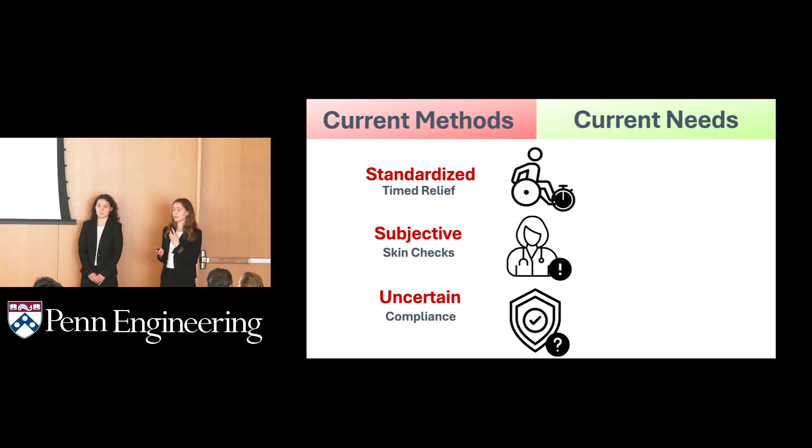standardized 30-minute time intervals. Skin checks are the secondary line of defense, but clinician judgment is subjective and varies heavily by the clinical training or the skin tone of the patient. And compliance is uncertain. We have no way to track the timing of these strategies or to confirm that they're

effectively restoring blood flow. In talking with clinicians, we revealed a need for individual alerts attuned to the patient's unique risk, grounded in physiological data that can detect this initial rise in local skin temperature, and with real-time monitoring to confirm these strategies are performed effectively and when necessary. We've also identified comfort, function, price, and ease of use as the most important qualities to integrate in our solution.

And Levara has addressed all of this with a low-cost disposable patch that alerts paraplegic patients of elevated pressure sore risk with real-time monitoring of skin temperature data. We chose temperature as our metric because an increase in temperature is linked to an increase in inflammation, which is an early indicator of skin damage and pressure ulcer formation.

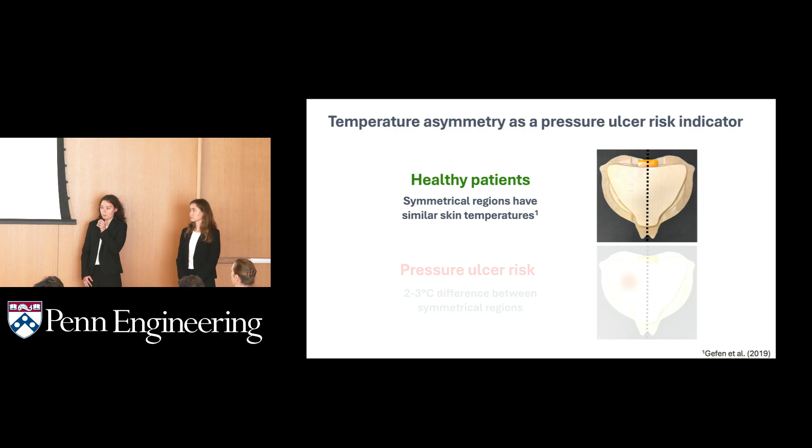We will be assessing temperature spatially instead of over time to mitigate the risk that the environment will have on our skin temperature readings. For example, the difference between being indoors versus outdoors today. This is backed up by the data, which says that across a symmetrical axis, healthy skin will have approximately the same skin temperature, but there will be a 2 to 3 degrees Celsius difference if one area is at risk

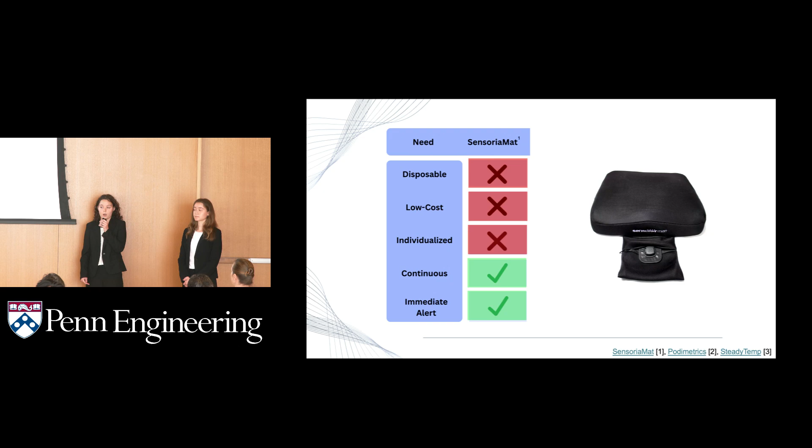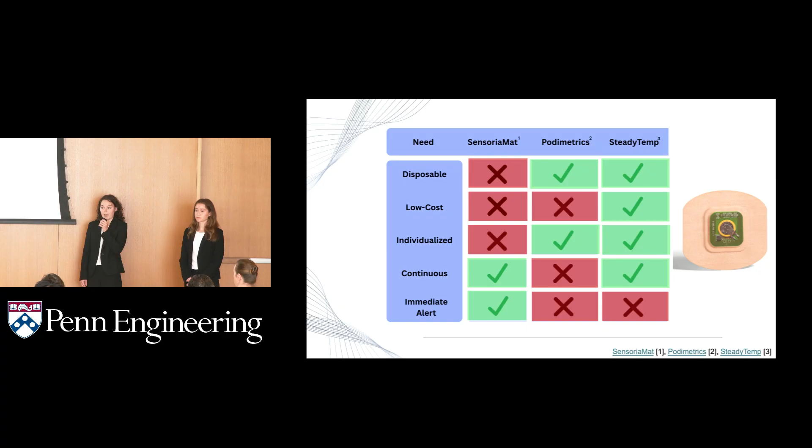for pressure ulcers. Our current competition includes a pressure sensing mat called the SensoriaMat, which is not individualized, low cost, or disposable, Podimetrics, which is not low cost, continuous, nor does it give an immediate alert, and skin thermometers like SteadyTemp that are not optimized for pressure ulcers and do not give an immediate alert to at-risk patients, while Levara does all 5.

First, it's disposable because it'll be on the lower back, where it will be exposed to a lot of sweat and incontinence, so for ease of use, it can be changed every 1 to 3 days. And since it's disposable, it must be low cost, which we'll do by having all of our complicated, expensive electronics in a separate relay center that can be attached and detached with each new patch.

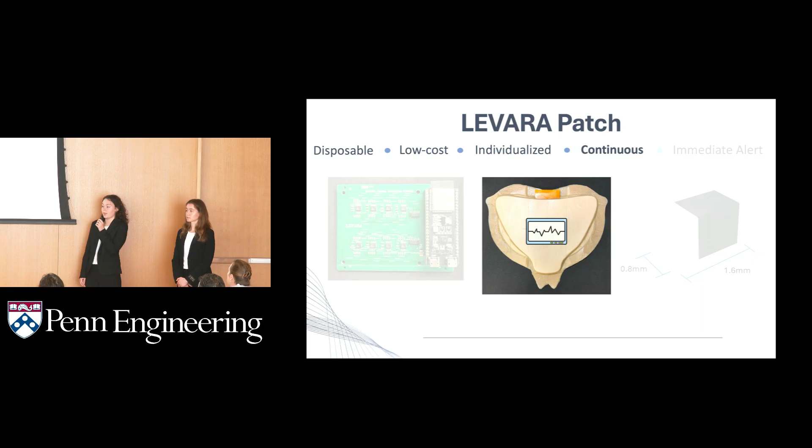Each patch has 62 thermistors that will be detecting temperature, making our design individualized, and they will be doing so continuously and giving an immediate alert when the patient is determined to be at risk.

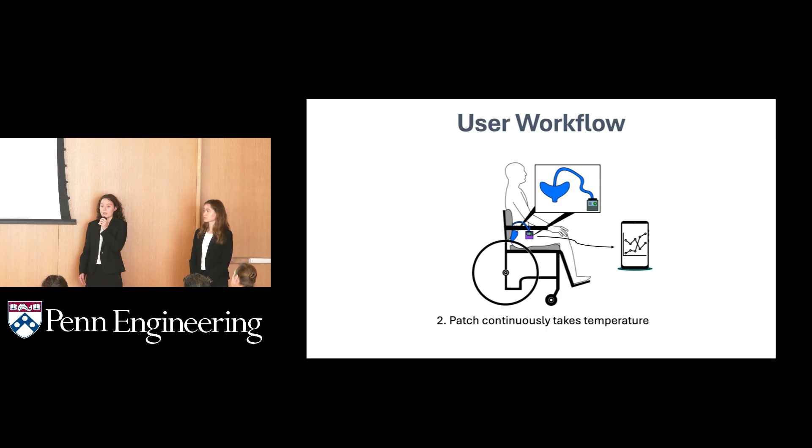So for the user workflow, first the patient will put the patch on their lower back, which is where a majority of pressure ulcers occur in paraplegic patients. Next, they will connect their phone to the relay center, which will start sending data via Bluetooth. When an area has been detected to be a higher temperature than its symmetrical counterpart, an alert will be given that will prompt the patient to either lift up or tilt back in the pressure relief position, depending on the type of wheelchair they have.

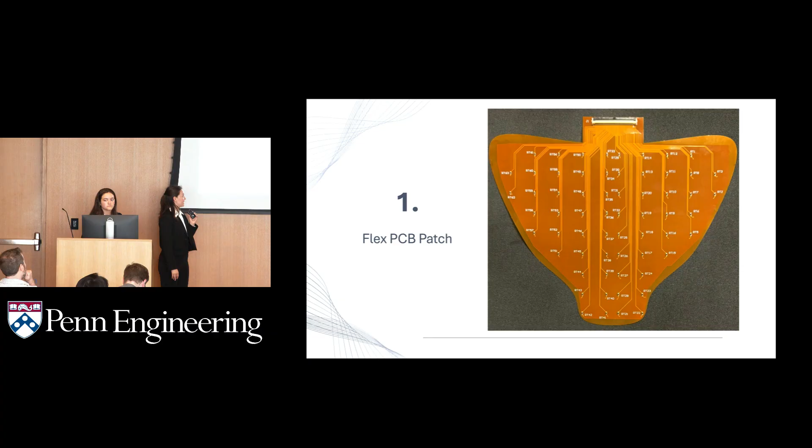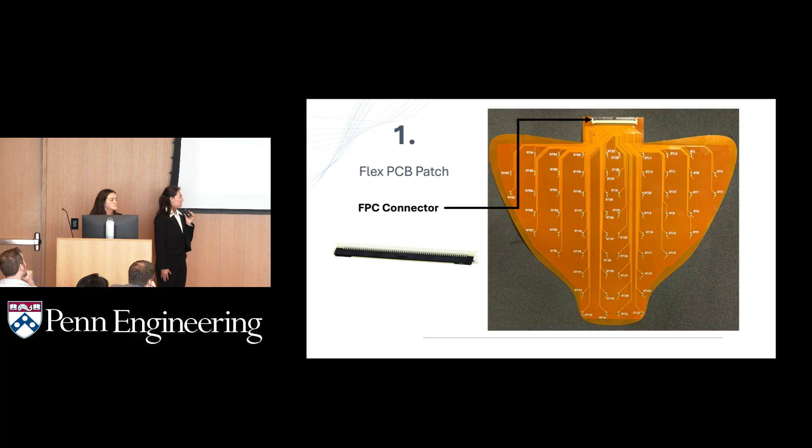Levara is made up of 3 main components. We'll start with the flexible PCB patch. This patch contains all of our thermistors with an improved 1% tolerance for temperature sensing accuracy. The small size of these thermistors means that they do not protrude from the patch, allowing patient comfort. The thermistors are connected to our relay center through an FPC connector. Disposing of the patch is as easy as disconnecting the cable and reconnecting a new patch.

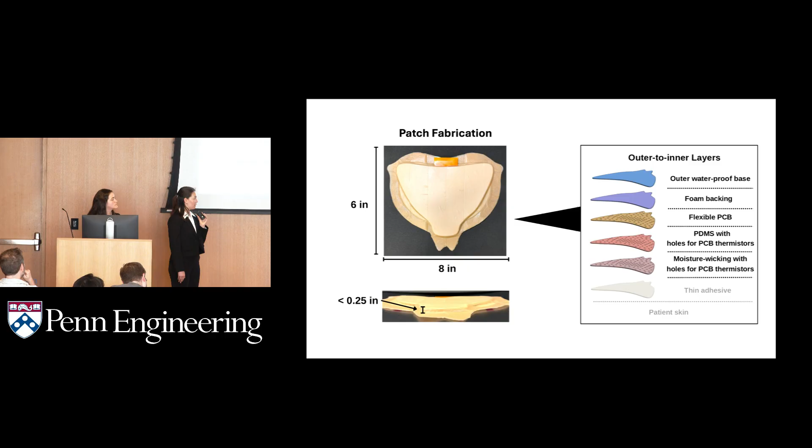An outer wound dressing covers this flexible PCB for patient comfort and electronic safety. This outer patch is made of multiple layers, each with a specific use intended. The outermost layer is waterproof for safety, followed by a foam backing for patient comfort, and then the flexible PCB sits with a PDMS layer that includes holes for the thermistors that also provides electronic safety. Next, a moisture wicking layer removes sweat and any moisture, which is also a risk factor for pressure ulcer development. And finally, a thin adhesive adheres the whole patch to the patient's skin.

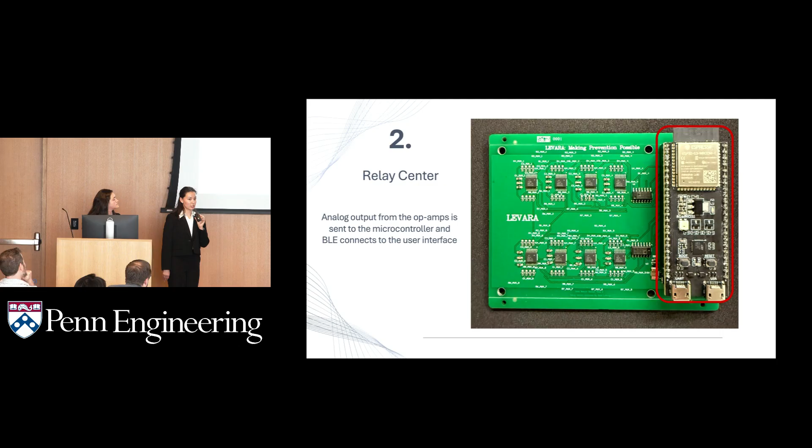The second component is the relay center. This relay center contains 8 multiplexers, which receive inputs from all of our thermistors. The outputs from the multiplexers are then sent to the operational amplifiers, which finally send their signal to the microcontroller. The microcontroller uses Bluetooth Low Energy to interface with our final component, the user interface.

Our user interface prompts the user to connect through Bluetooth and is compatible with mobile phones and computers, allowing Levara to be accessible to as many patients as possible. Additionally, users are able to view trends and they can send their data to trusted caregivers or physicians to better their care. Levara has come a long way from its conception. Let's walk through our design goals from proof of concept to present.

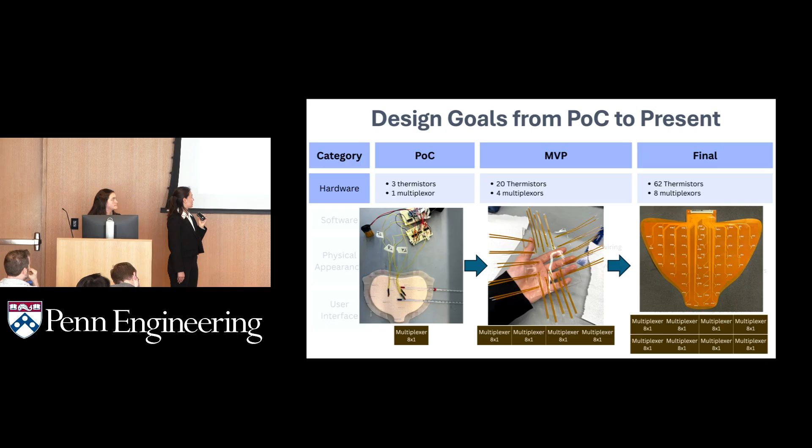Starting with our hardware design goals, our proof of concept used 3 thermistors and 1 multiplexer. Our minimum viable product then used 20 thermistors and 4 multiplexers, and our final iteration included 62 thermistors with 8 multiplexers. For our software design goals, we began with an Arduino, and for both our minimum viable product and final, we used an ESP32.

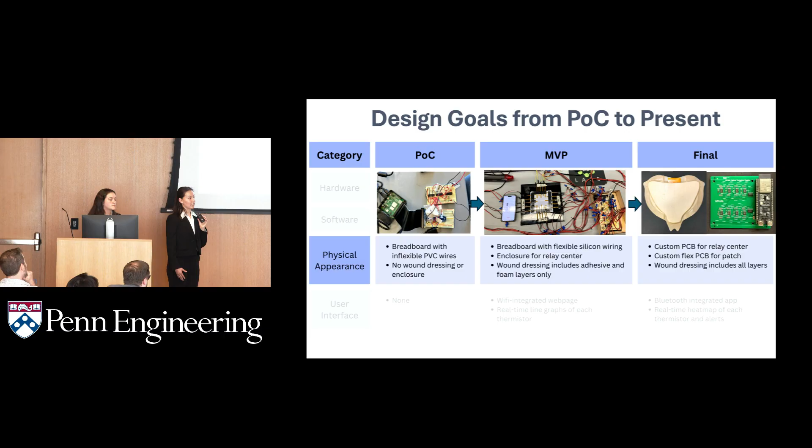For the physical appearance, we began with a breadboard and inflexible PVC wires, and changed these to flexible silicone wires for comfort, and we added an enclosure for the relay center as well as some parts of the wound dressing. Finally, we have 2 custom PCBs, one for the relay center and a flexible PCB with the full wound dressing layers included. And for our user interface, we began with nothing, then had a Wi-Fi integrated web page, and finally have an app that's compatible with mobile phone and computer that's Bluetooth integrated.

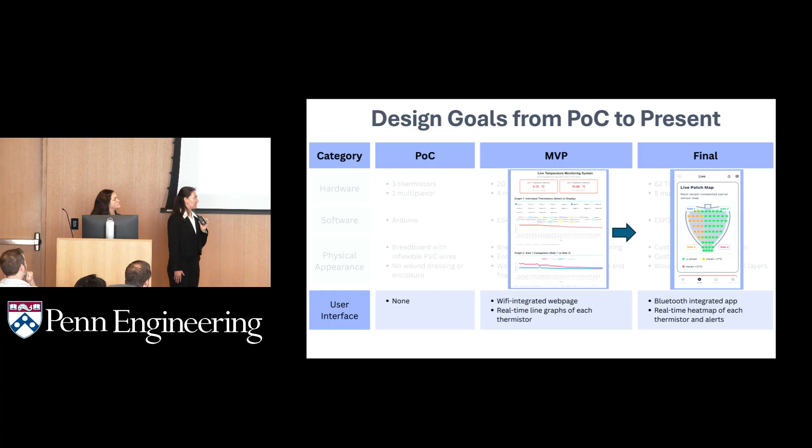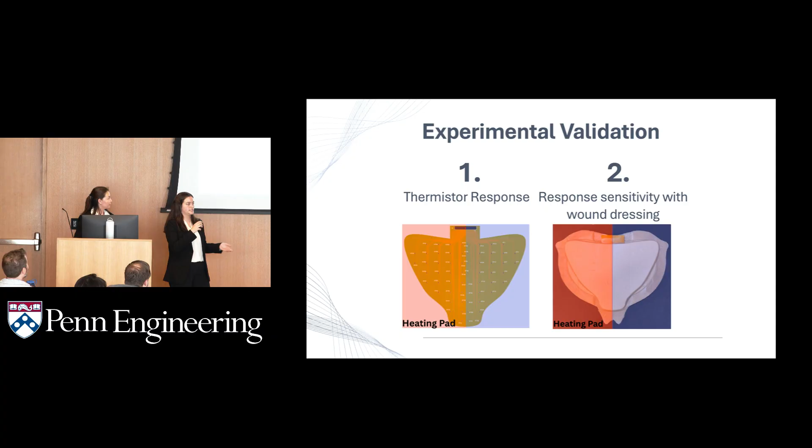So now that our design goals have been met, we sought to test Levara for efficacy. We started this by testing the thermistor response just in the Flex PCB and then retesting after we incorporated the wound dressing layers. We did this by testing only one side of the patch to model that temperature asymmetry. Based on the PCB testing, we can conclude that our thermistors successfully detect temperature within 2 degrees Celsius. This is one representative trial in which all of the thermistors on each side were averaged for comparison.

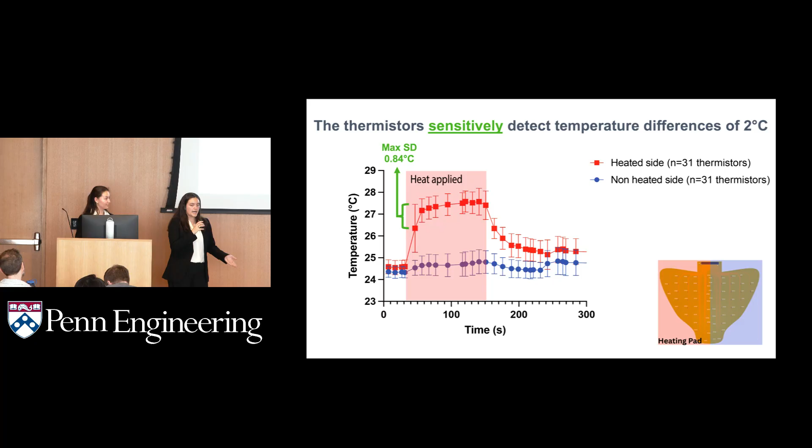And you can see that Levara is able to rapidly detect temperature difference when heat is applied and notify the user of increased pressure ulcer risk. Not only are our thermistors accurate, but they're sensitive, with the max standard deviation being less than 1 degree Celsius. And when averaged across multiple trials, Levara is able to consistently detect this temperature difference within 2 degrees Celsius.

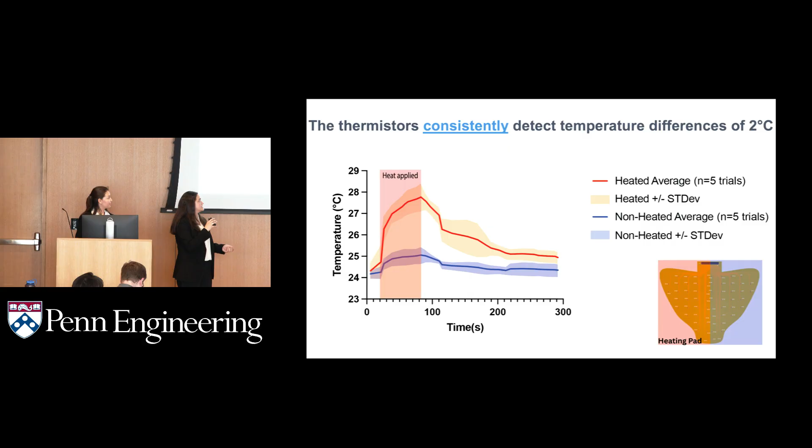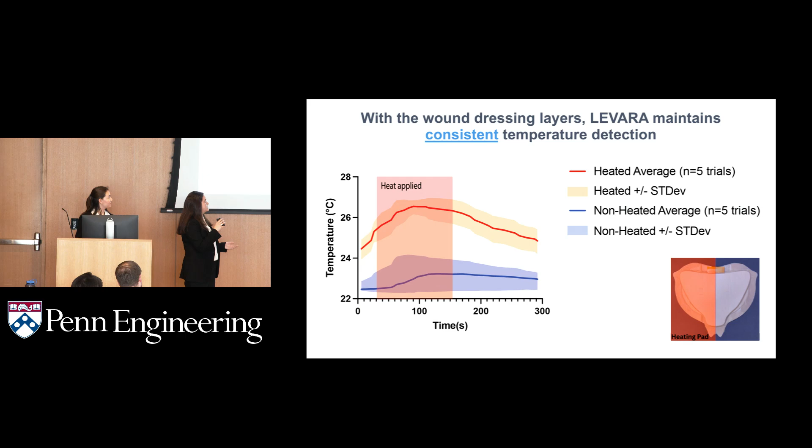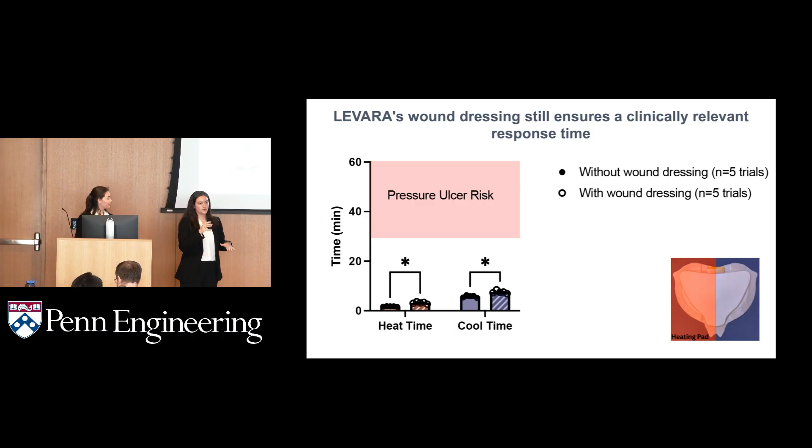After integrating the patch, we were able to maintain that sensitivity to temperature detection within the 2 degrees Celsius. And again, when averaging across multiple trials, Levara maintained the consistent temperature detection. We did notice that adding the wound dressing layers did slow the response time between the heating up and cooling down. However, this response time is still well below the time it takes for a pressure ulcer to form.

So based on the data we've collected, we've identified some key challenges that we would like to improve. The first being the wiring from the relay center to the patch. We'd like to improve this by incorporating a Bluetooth connection to allow for more flexibility for the user. The second is we'd like to decrease that response time within our patch. So we'd be looking to refine our patch materials, which would hopefully allow for quicker heat transfer without an excess

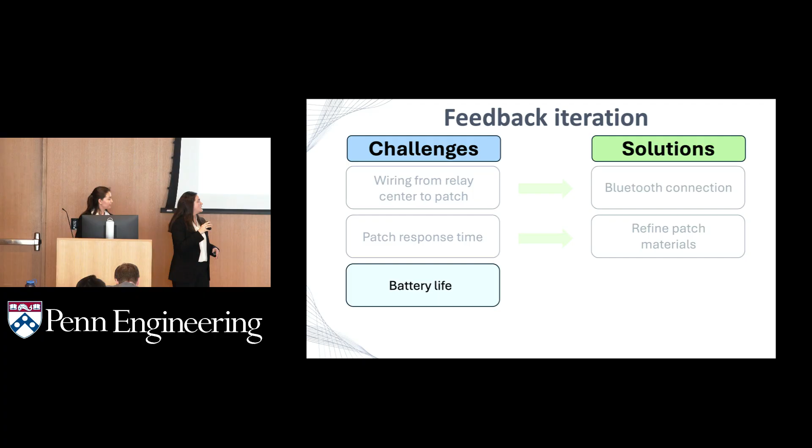buildup within the patch. We also need to look at battery life to make sure that our patch is able to sustain this power for the entire 3-day duration that we want. So we'll be looking at improving our power bank for longer lasting operating time.

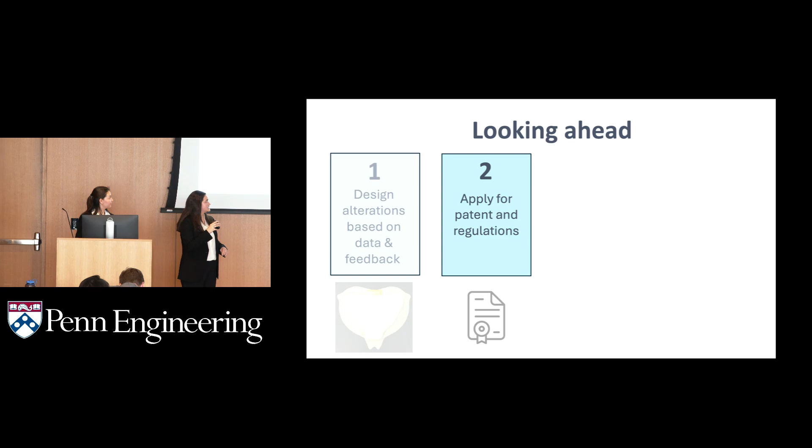Looking ahead, we'll be integrating the design alterations discussed. We'll be applying for patents and the relevant regulations. We'll continue in-lab testing and integrate clinical testing for efficacy and safety. And eventually we'll want to look into how this technology could be applied to new skin areas that are also prone to pressure ulcers, such as the back or the back of the legs.

At Levara, our mission is to restore awareness where it's been lost. Our patient-centered design can ultimately help make prevention possible rather than treatment necessary.

We'd like to thank our mentors and our professors for their help and guidance. And thank you. We'll take any questions now.

Hi, nice job. How thick is the attachment up at the very, very top? The connector? Yeah, how thick is that? So the entire patch is about 0.6 millimeters. So the entire patch is less than a quarter of an inch. The actual FPC connector is even smaller than that. It's a fraction of that entire patch.

Okay, and then I may have missed this. Is this just to alarm, or is the patch doing something as well, or is it just to alarm? It's just to alert the patient based on the temperature sensing that it reads. Okay. Yeah. Okay, great. Thank you.

Nice job. Great job. One question I had for you guys is, what is your spatial and temporal resolution of these sensors? You showed a figure showing that the pressure ulcer takes tens of minutes to be a problem, but what is your actual spatial resolution, like how big a spatial temperature change can you detect? And then related to that is, what sorts of things would you imagine might cause false positives or false negatives with your sensor?